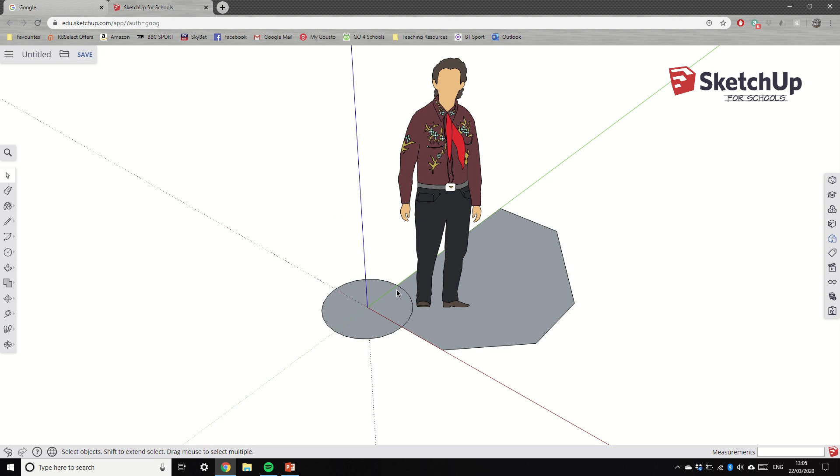So what we're going to do is I'm going to delete that circle because I don't like it. I've got this piece of pie that's cut out because I overlapped one circle onto the original floor. If you click on the line, then press delete on your keyboard, it will delete that part. Then there's a line here, I'll delete that, and a line there, delete that too, to make sure this is all one shape.

I can check that by clicking, and now you see there are tons of little dots showing I've selected it, because I deleted those lines it now selects the whole floor. If I click off and show you again with the left mouse button with my select tool, it shows that it's all selected.

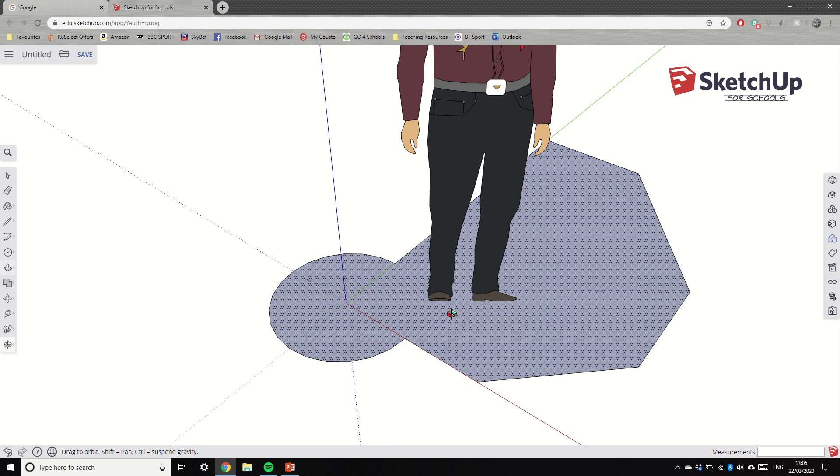So I've now selected it, and I'm going to go down to this button that says push pull - that one there. Now this is where things start to get 3D. I'm going to click once with the left mouse button and let go - can't stress that enough guys, you have to click once and let go.

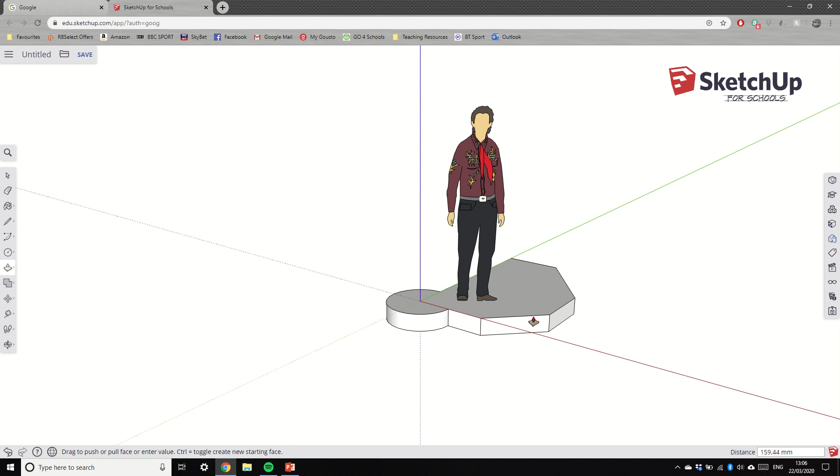And now I can create something going downwards. So this guy's got this weird stage that he stood on. It can go the other way, so you can now start being slowly smothered in quicksand. I can just create the thickness that I want, and click again, and once I've clicked again, it will go.

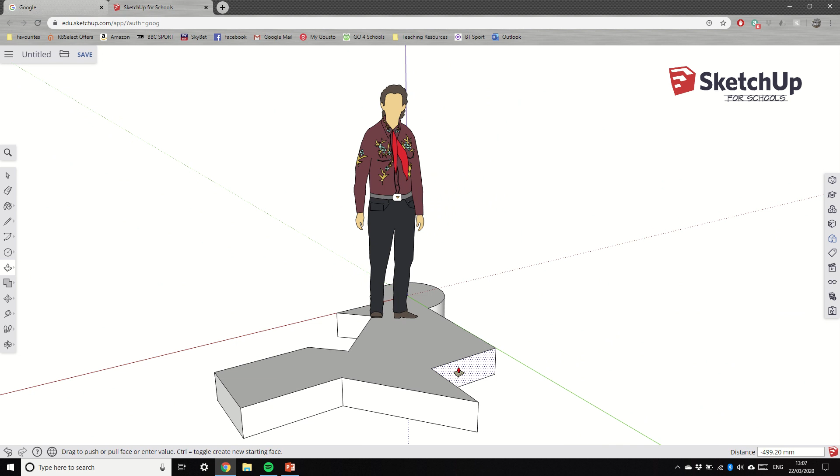Now the other thing I can do is, because all of these separate edges are being selected, not the circle edge but these ones, I can use the push pull tool to make them go out. It will also remove material, so all of a sudden he's standing on nothing, so it could make it a bit spiky. I could try and move this in a little bit and then move that one out, and you get the idea. So we can now start to redraw things just by playing with that.

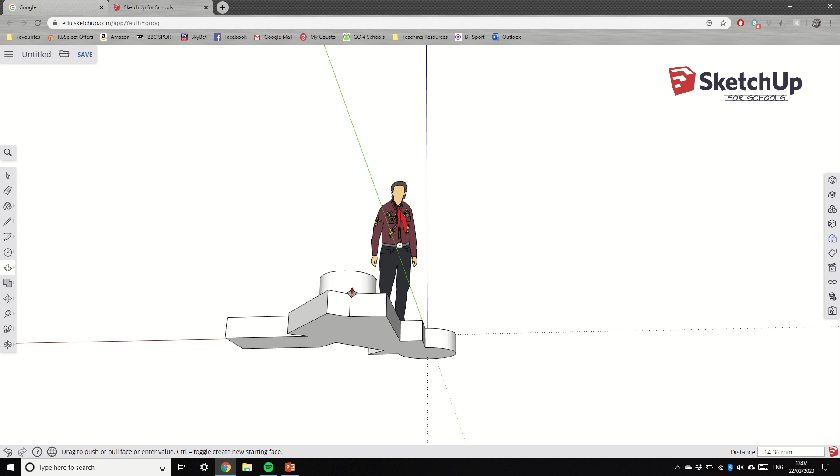I can then add stuff on top, so I could draw a little circle here, go back to push pull, and now he's got like a little bar to stand at. Or if I go the other way, the push pull tool not only adds material, but if I pull it down it will come out the bottom. But if I only touch it onto that bottom line, it actually hollows things out for me, so it creates this shape.

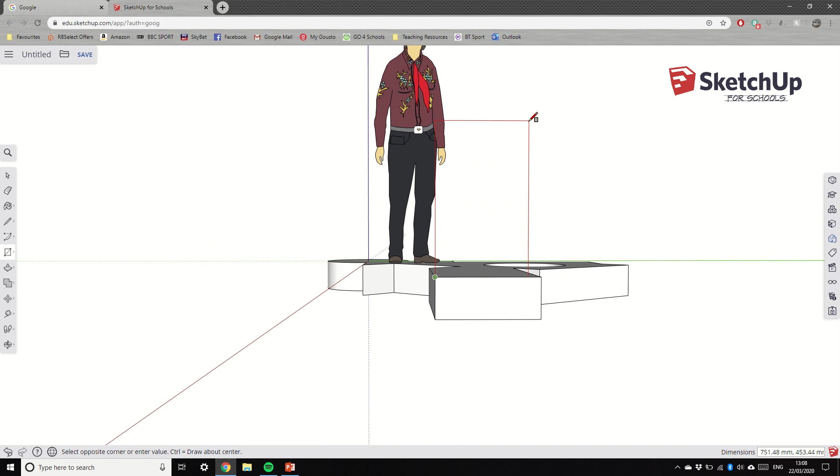So have a little play around, try and draw a few shapes, draw some new ones elsewhere. You can try and draw something on a wall if you want, and once you've got your single shape, you can then start to add other shapes in as well. So if you wanted to, I could draw something here, and then use the push-pull tool, and now there's like a little table. So that is all about making things 3D.